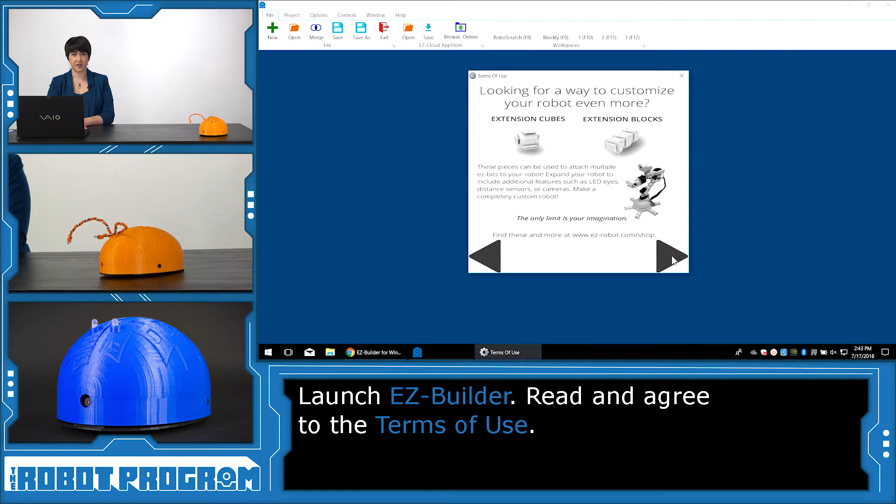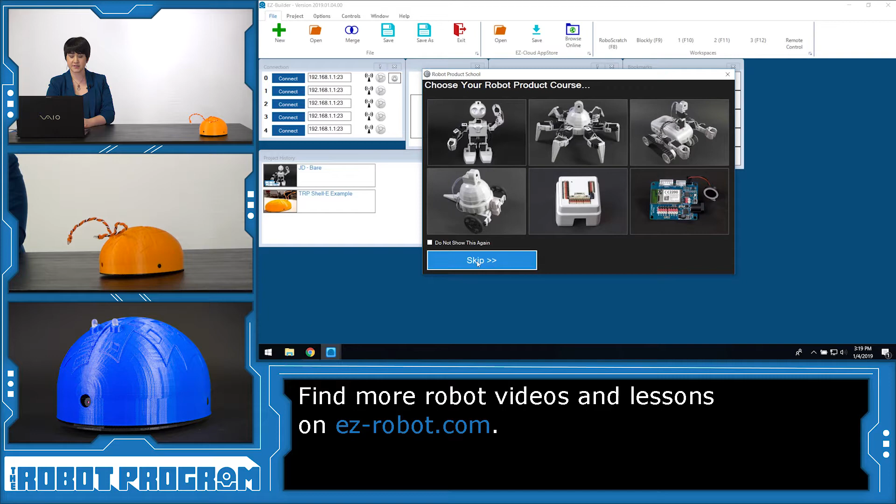If you don't have an EZ-Robot account, now's the time to make one. If you'd like to learn more about a specific robot, you can click on the image to go to the robot course on our website. For now though, I'm going to click Skip, and in the Example Projects menu, I'm going to click on

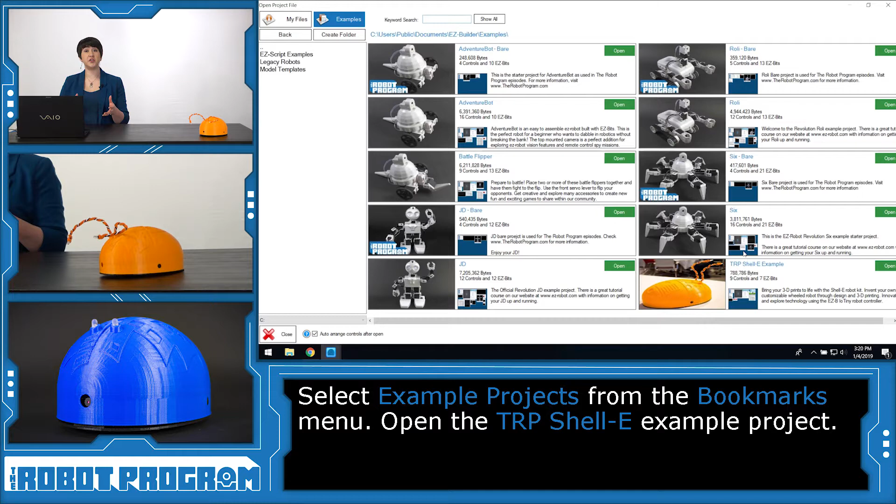the TRP Shell-E example. In this example project, you'll find some default controls for the Shell-E robot. It also includes the building instructions. If prompted, click Sync Now to update all of the latest EZ-Bits from the EZ-Cloud.

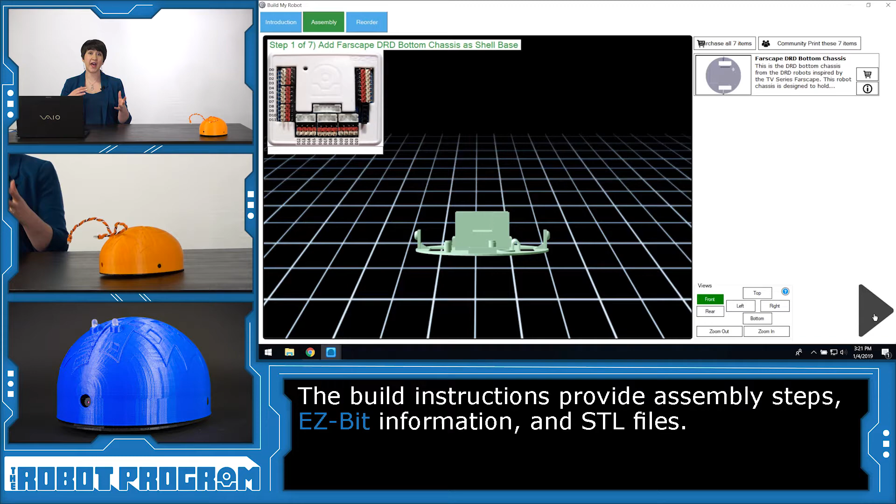This gives you all of the updated files for printing your Shell-E robot. The build instructions will take you through all of the steps to actually put together your Shell-E robot. But first, we need to 3D print the chassis that we're going to use to add the hardware components to.

Over here on the right-hand side, we can see the Farscape DRD bottom chassis. That's the example Shell-E build that is based off of the DRD robot from the TV series Farscape. Those are the ones that we're going to print today: the top, the bottom, and the brackets that are inside holding the continuous rotation servos.

So there's 3 different STL files that we'll need to get from the software. STL files are used for 3D printing.

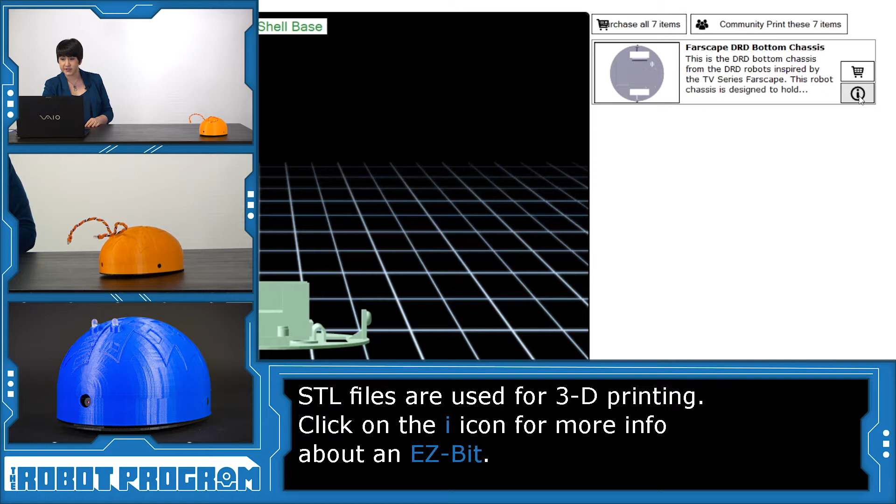If I click on the i icon next to my EZ-Bit, I can see more information. And here it says Save STL. I'm going to click Save and download it to my computer. Read through and accept the terms of use.

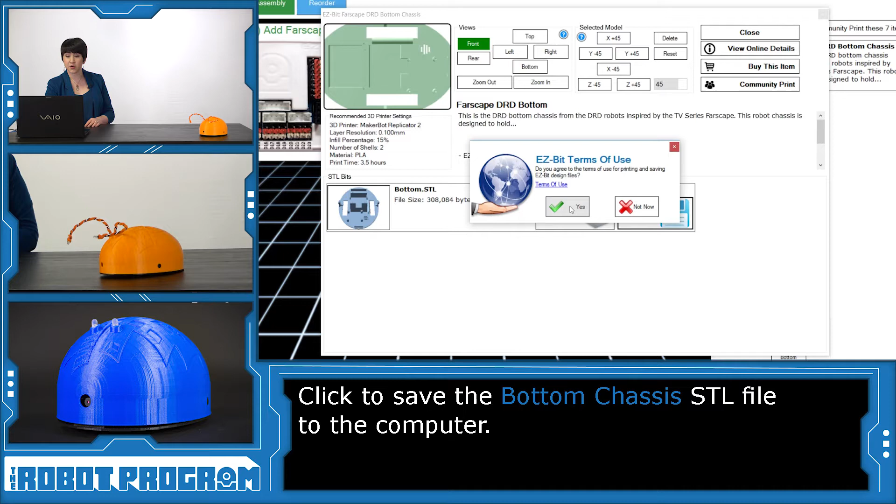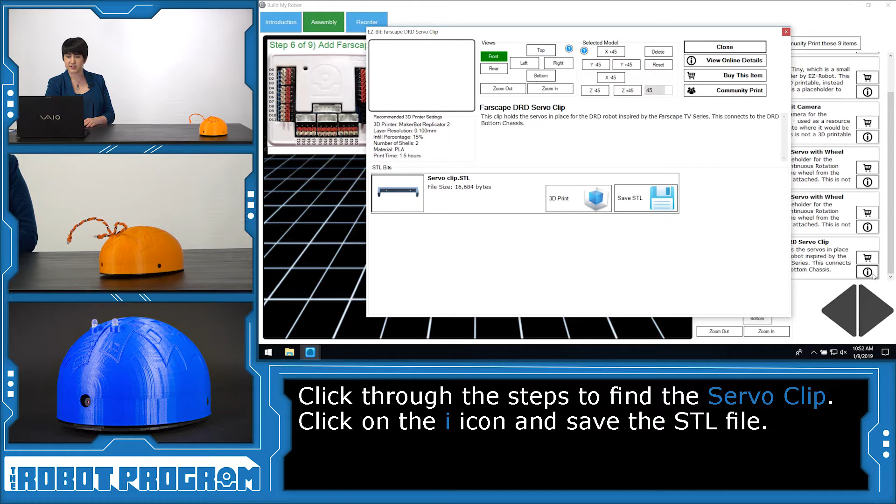So in my EZ-Builder account, I'm going to save the bottom STL. I'm going to click Next and keep going until I get to my continuous servo with wheel and the servo clip. Good, and again, I'm going to accept the terms of use and save my STL.

And then I'm going to keep clicking through until I get to my Farscape DRD top body. Again, save the STL and save to my computer.

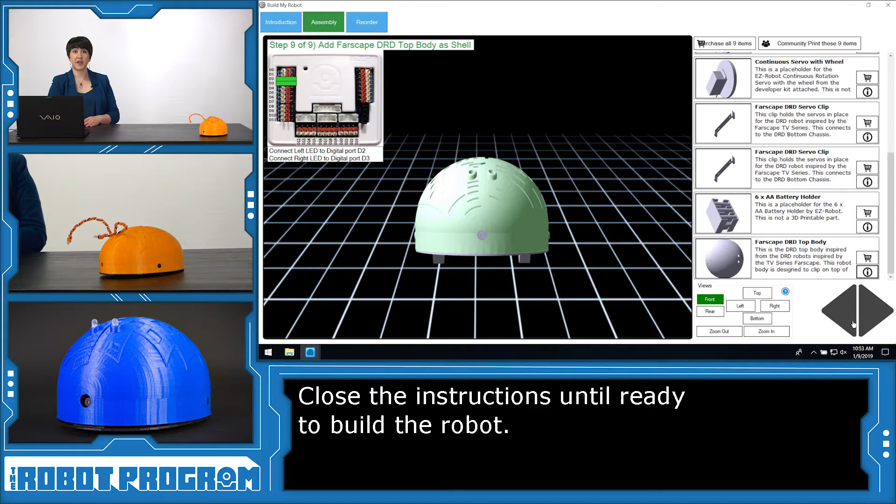Okay, for now I'm going to close the building instructions because I need my chassis before I can start building my robot. Now it's time to take my files to my 3D printer and start the 3D printing process.

To print the files, I need to get them into my 3D printing software. So I've saved them all here to a folder called TRP Shell-E files, and I've got the bottom STL file, the servo clip, and the top STL file. I'm going to open up MakerBot, and you're going to open up whatever software you're using for 3D printing.

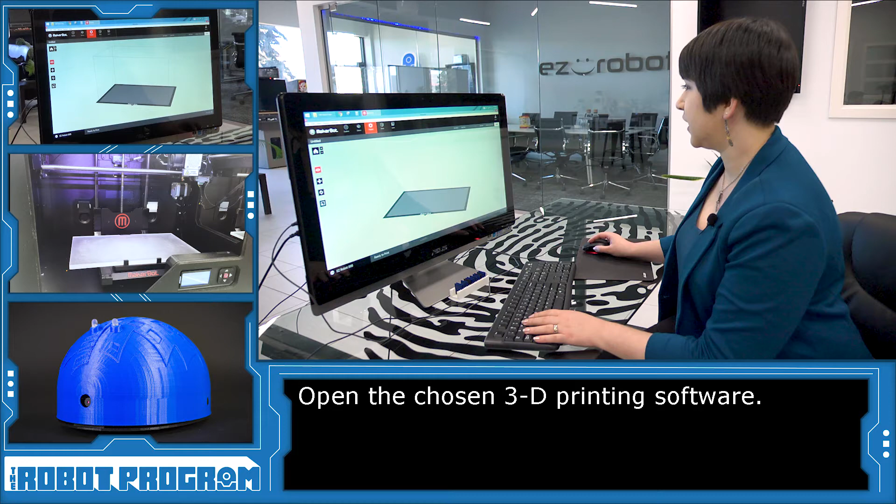So in here I can say Add File, and the first one I'm going to print is the top. Click Open, and I don't want to scale it. So it's too big for my printer window here.

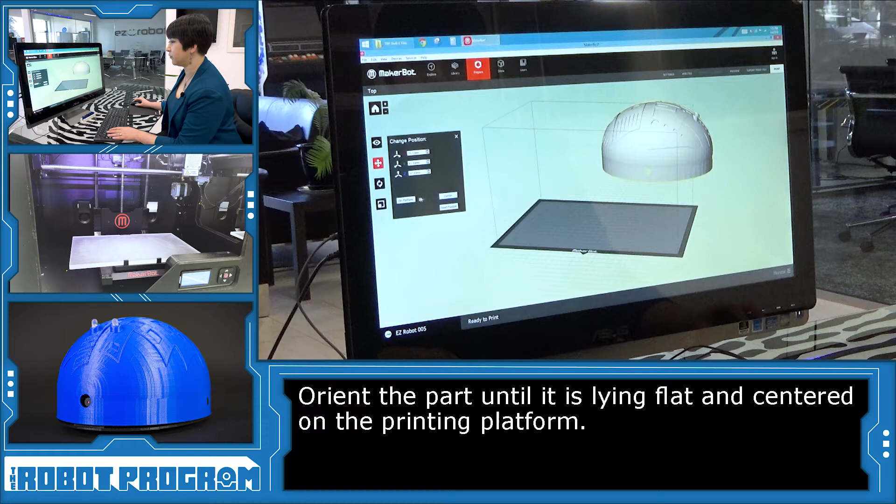So first I'm going to click on my shape. This is our top chassis. And I can change the position and I can rotate it. So I'm going to rotate it until it's lying flat on the podium. Good. And then I'm going to put it on the platform and center it.

Great, so you want to make sure that your print is going to be in line with whatever your dimensions are. So in this case, I know that if something is off of here, it's going to be off of the printer bed, and I'm not going to be able to print it. So this is the top of my Shell-E chassis, and it's ready to be printed.

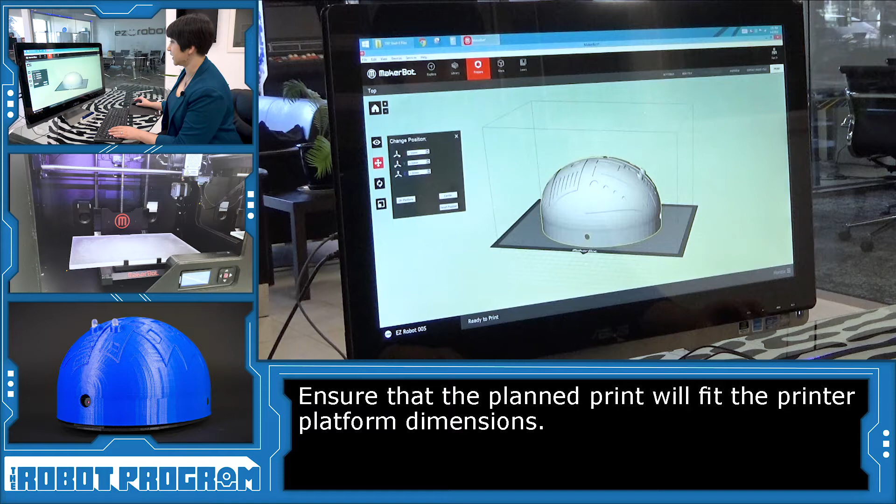First, I have to change a few settings though. So in here, I want to make sure that the layer height is 0.2 millimeters. This is our recommended layer height. We also recommend an infill of 10%.

I'm also using a raft, and it's up to you if you want to use a raft depending on your 3D printer. And I'll show you what the raft looks like when we're finished with our print. This just helps to give a little bit more security and stability for the print on the platform.

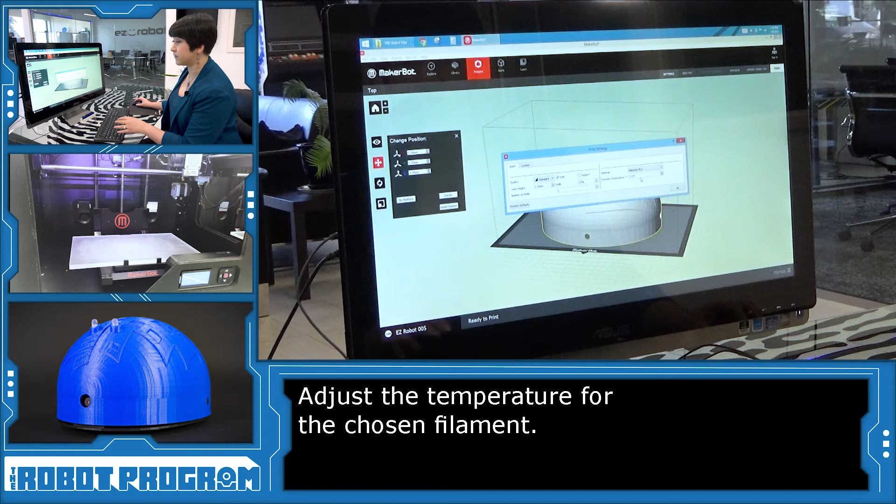And I'm going to click Print. I'm just going to open up the bottom chassis and the servo bracket files so we can see what they look like. So in here, let's start a new file.

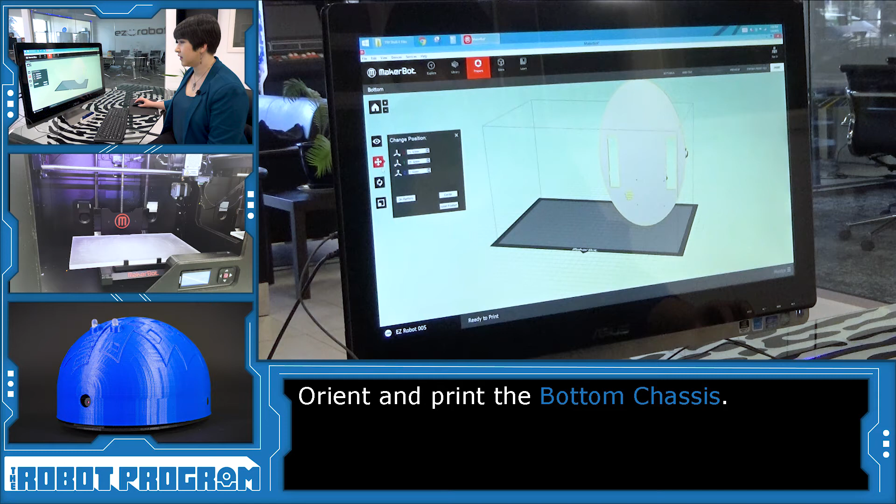And I'm going to add in the bottom chassis. Again, don't scale, and I'm going to rotate my shape. So this is what my bottom chassis should look like before printing.

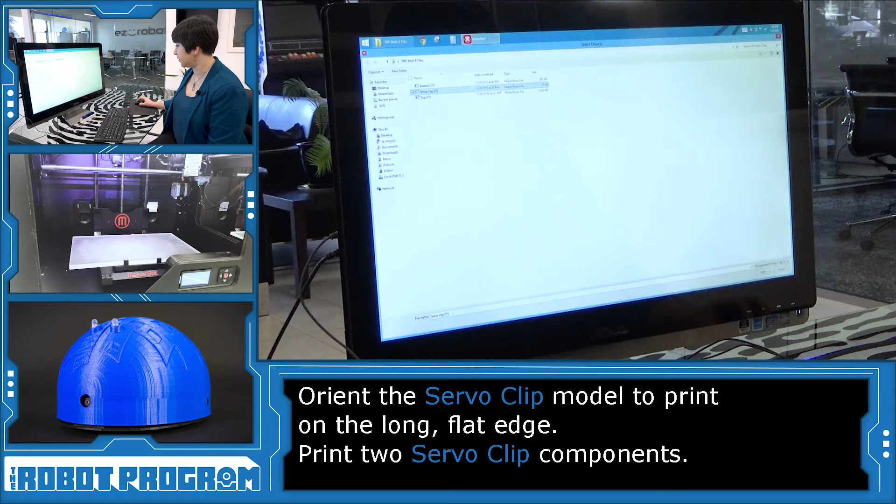And last but not least, I'm going to create another new file using my servo clip. So you can see here, I've got one servo clip, and I actually recommend flipping this to print it as well. And again, I'm going to center it and place it on the platform. You'll need to print 2 of these servo clips.

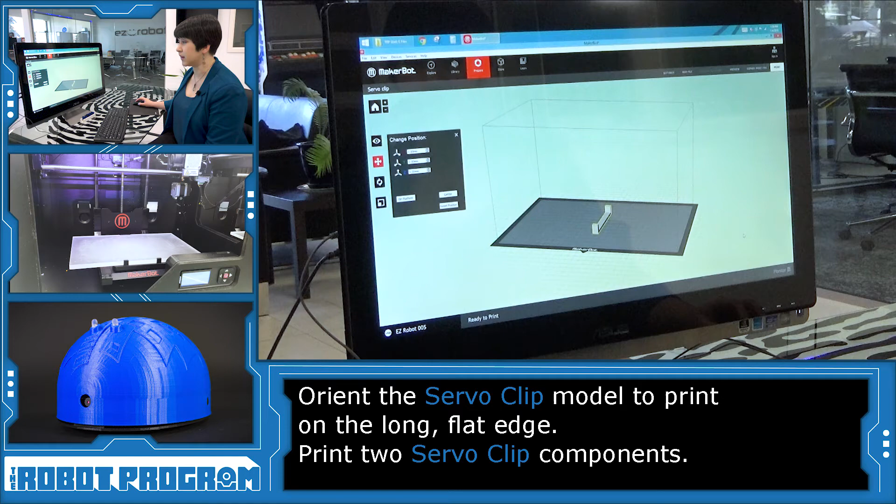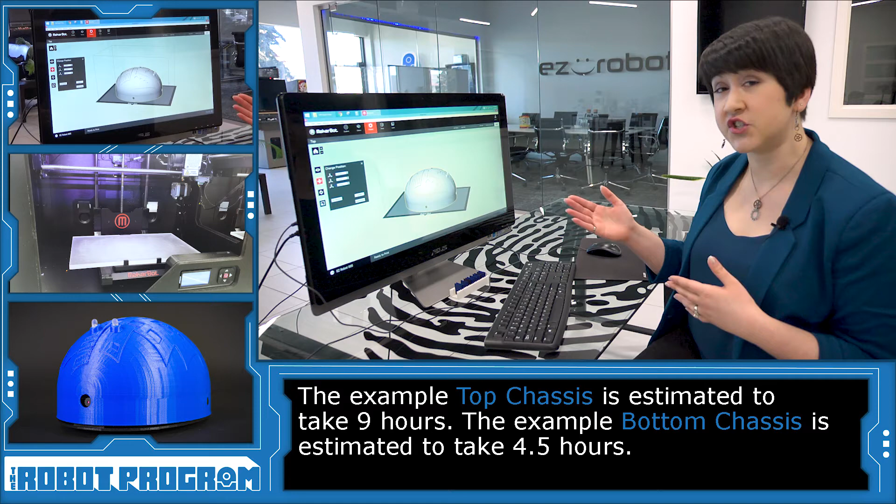The print time for the top chassis is about 9 hours, and the bottom chassis takes about 4.5 hours, but this will depend on your printer. It'll also depend on if you make any changes to the file. Maybe you want to get creative and completely design your own version of the top to go onto the bottom chassis. That's great, and we want to see that creativity, but it might change how much filament you use and how long your print time is.

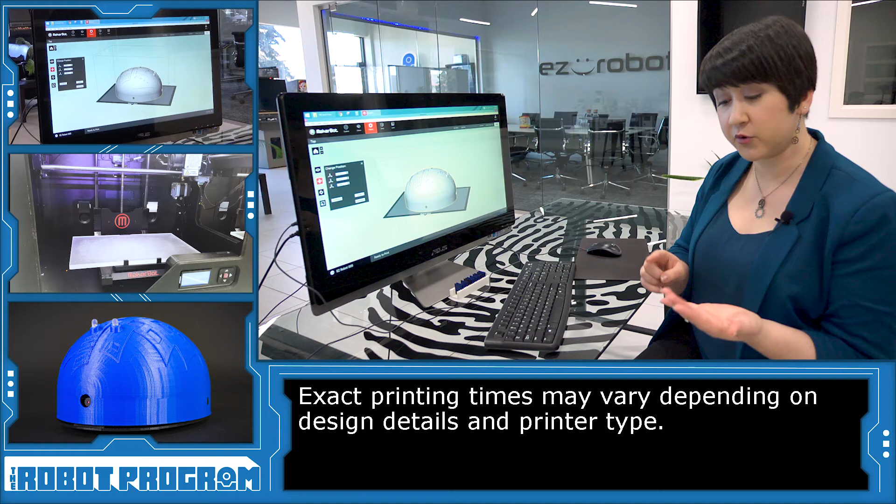Remember to print 2 of the servo brackets. So you're going to print the top chassis, the bottom chassis, and 2 of the brackets.

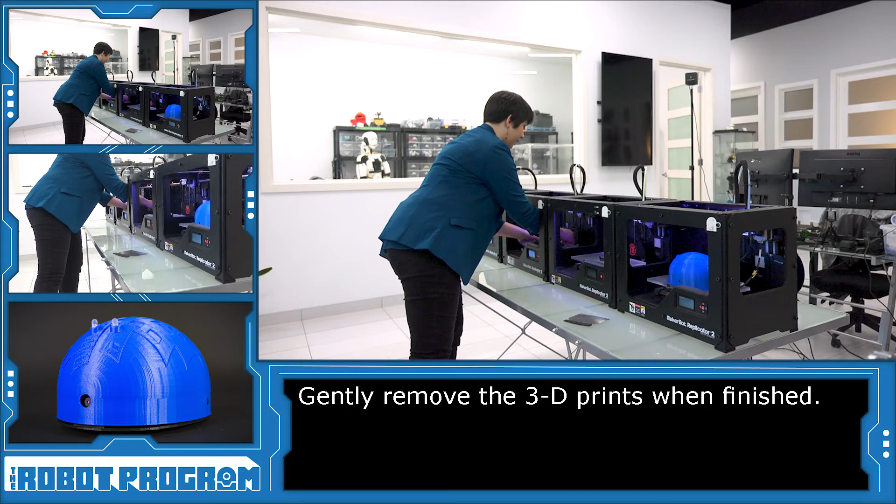Now that my prints are finished, it's time to get them ready for the building process. First, I'm going to take out the platform with my bottom chassis. And I'm going to remove my 2 servo clips. And I have a platform with my top chassis.

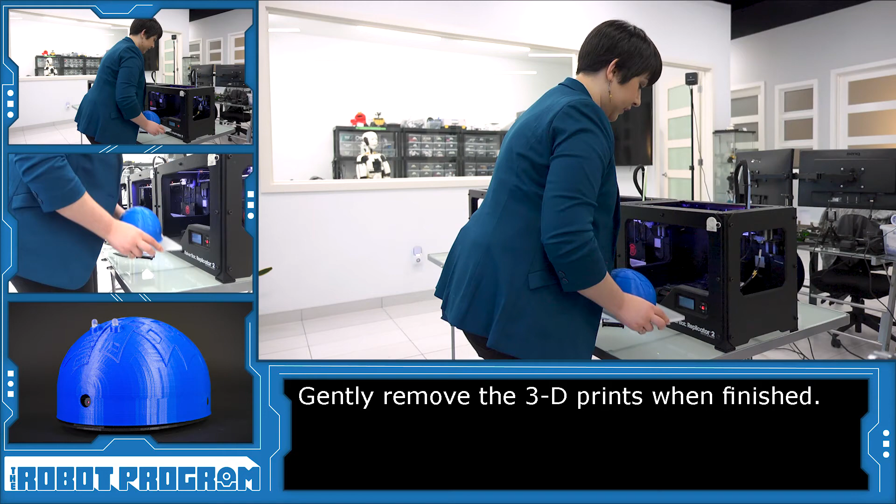Because I did the 3D printing on a raft, it means that a little bit of extra plastic is on each of my prints. So first I have to separate the raft from my print. When we're using tools, we want to make sure that we're using them safely. I'm going to put on gloves as a precaution. Now, even though I'm wearing the gloves, I want to make sure that I'm scraping away from myself and doing it safely.

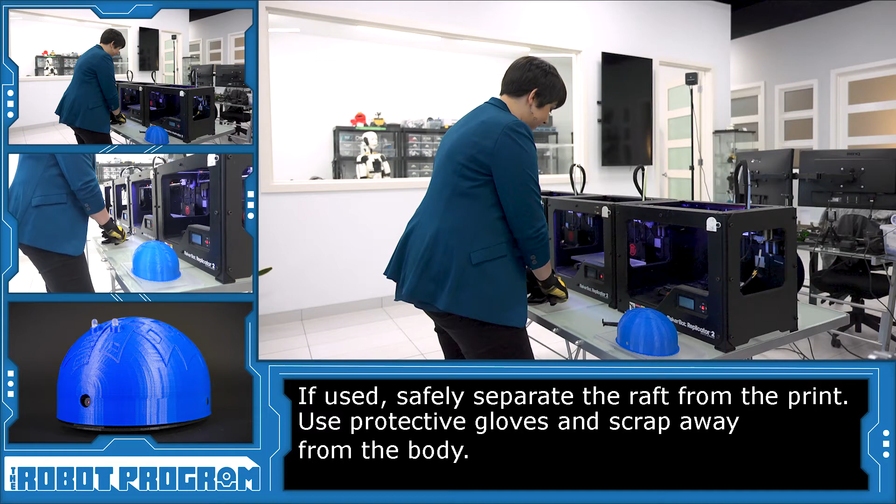Okay, so now my bottom chassis is ready to go. I'm just going to put that to the side for a minute. And I'm going to repeat the process for my top chassis.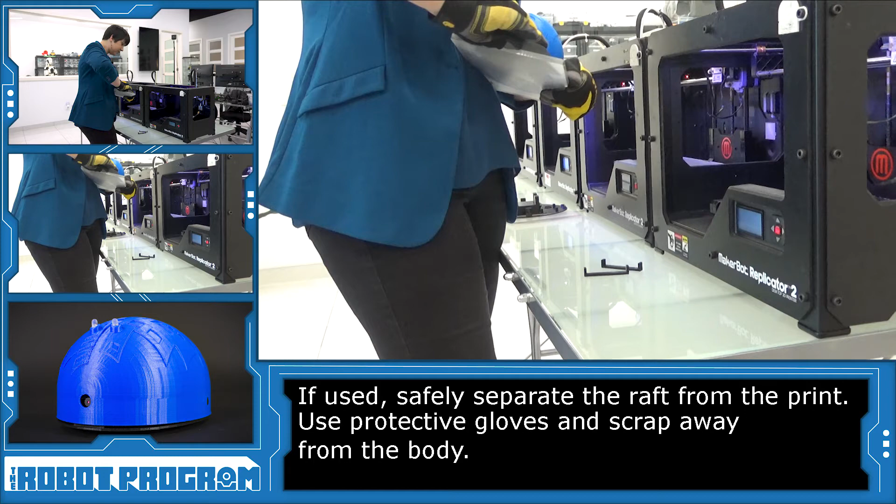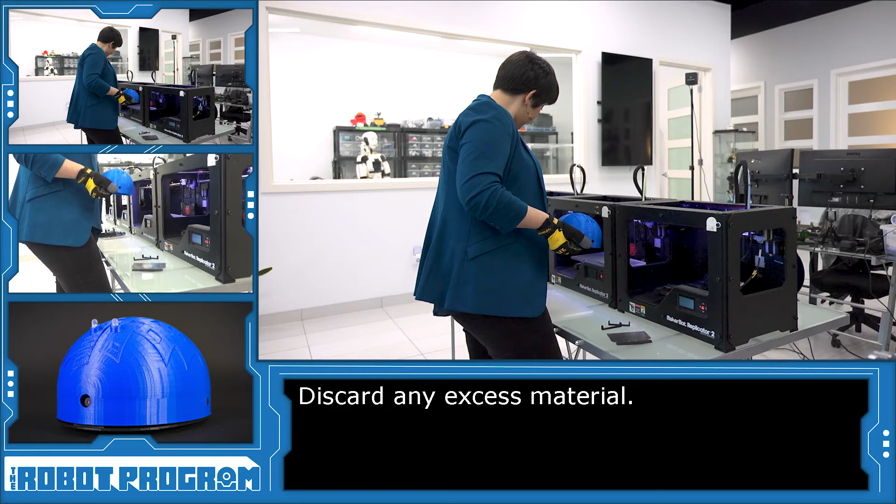Okay, so as you can see, I've got this little bit of extra plastic that was used to secure my print, and you may or may not have it depending on your printer or printer settings. So I don't need to use this, so I can discard this. And the pieces that I need for building are my top shell, my bottom chassis, and my 2 servo clips. And now I'm ready to build my Shell-E robot.

In this episode, we reviewed the steps for 3D printing your own robot chassis to use with the Shell-E Innovation Kit. To access the example STL files, you'll need to download EZ-Builder from EZ-Robot.com.

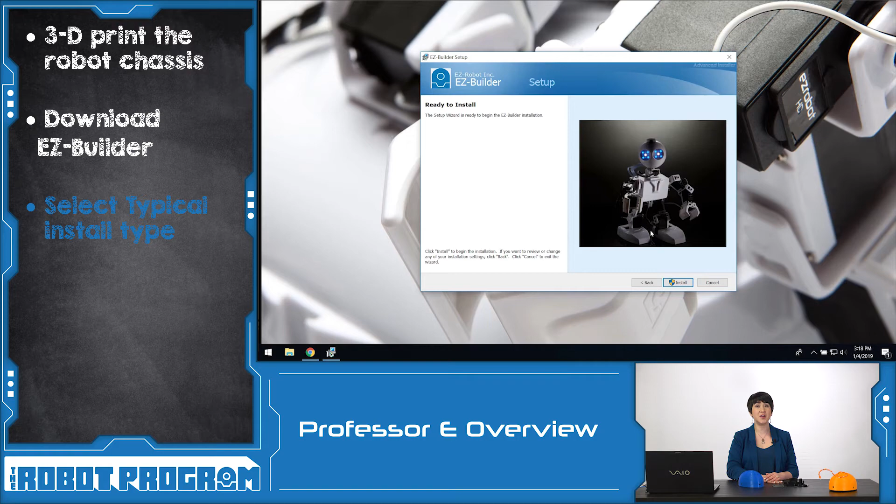Run the EZ-Builder installer and select the typical install type. Read and then accept the terms of use, and if you don't already have one, create an EZ-Cloud account. From the Bookmarks menu, click on Example Projects and choose the TRP Shell-E Example Project. This is an example project that has some default controls for getting started with your Shell-E robot.

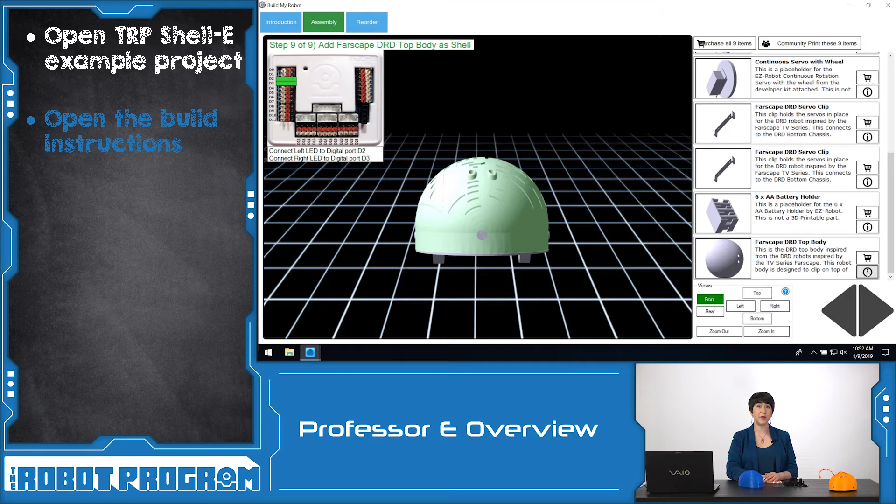Open the build instructions to find the STL files for each of the EZ-Bits. Click through the build instructions to find the files for the top chassis, the bottom chassis, and the servo clips. Follow the recommended instructions for your 3D printer and its software. We recommend the settings of 0.2 millimeters and 10% infill.

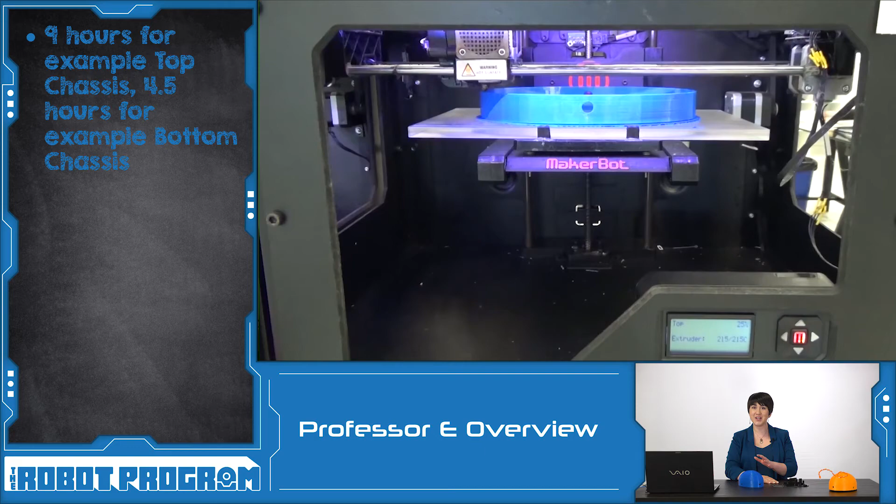You can choose to use a raft if you want a little bit more stability for your print. Be sure to print 2 servo clips in addition to the top and bottom chassis. The Farscape-inspired DRD robot chassis will take about 9 hours to print the top and about 4.5 hours to print the bottom chassis. If you are using any tools to remove your 3D prints from the platforms, be sure to do so safely.

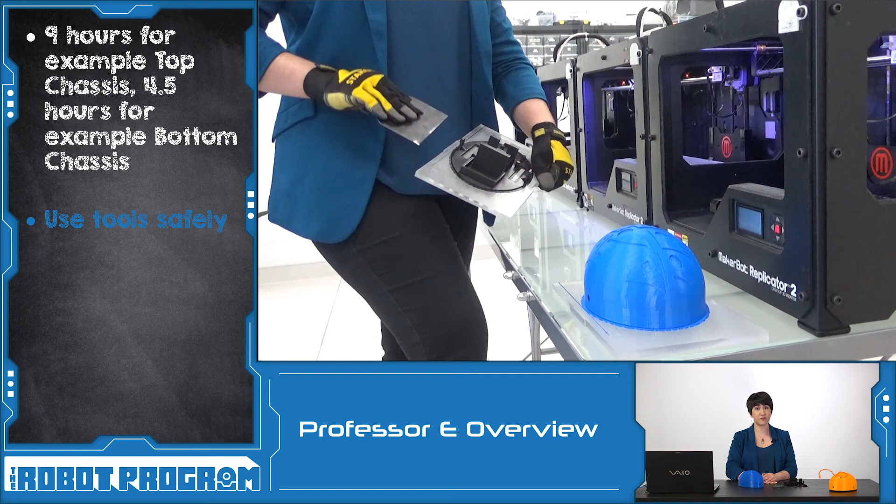Which 4 components need to be 3D printed to create the robot? What is the recommended infill setting value? What is a raft used for in 3D printing?